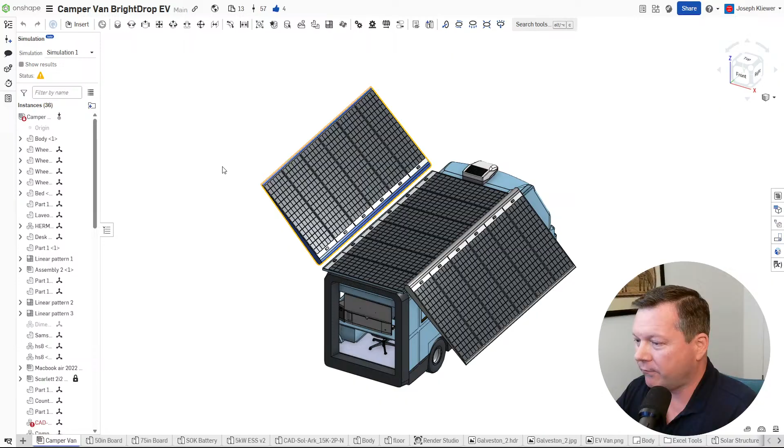We're looking at this BrightDrop van, and I thought today we could look at the solar panels. We had a lot of good input, different ideas. You know, do you actuate them? Do they fold up? Do they slide out? Do they fold down along the side? What about shading issues? What are the best panels? That kind of thing. So I got a calculator up here, and we can try out a few different options, kind of see what might be the best way to go.

So let's bring up the panels first. Let's take a look. What I'm looking at right now is these Maxeon cells, which is the same one... oh gosh, I'm just drawing a blank here. The solar car. That'll come to me in a minute. But they're really efficient. They're flexible. They're durable, and they have these panels that they're looking at making potentially here in the U.S. soon, and they're about 2 meters long.

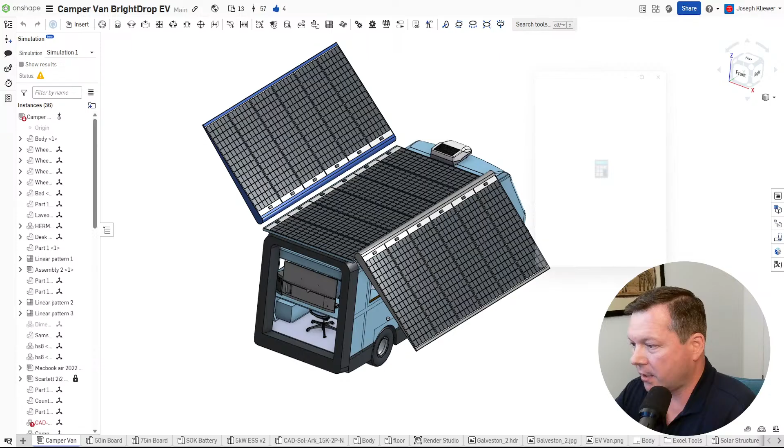2,000 millimeters by 800 millimeters, and the Maxeon can put out 340 watts per panel at almost 21% efficient. So that's what I've got modeled here. I've got 1, 2, 3, 4, 5, 6. So you've got 3 arrays. Each of them has 6. So what's 6 times 340? You've got that much per, and then times 3 for a total of just over 6,000 watts.

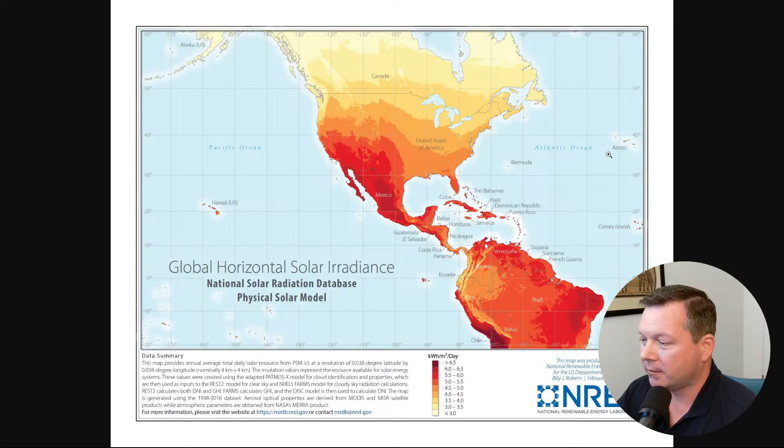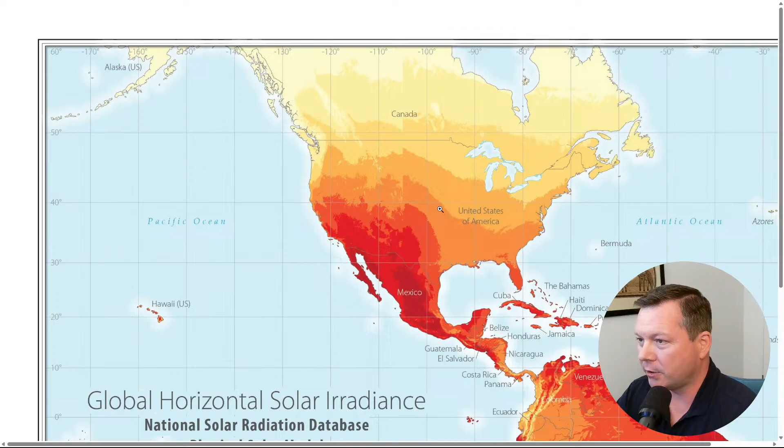So let's try out a few scenarios. For location, it really depends on where you're at. So if we look here, you can see solar radiation. Where I'm at up here in Michigan, it's not so great. And then you get down in here towards California, Arizona, New Mexico, it's really good. But if we pick kind of a middle of the road, right in Oklahoma City, kind of in the middle of everything, it might be a good average. So, Oklahoma City.

All right, so in Oklahoma, and this calculator done by the National Renewable Energy Lab accounts for weather variation, I think averaged over 10 years. And you can get the actual Excel data, and I'll put the links in here, and you can really analyze it and go more detail. But this quick little online calculator is pretty nice. So let's just call it 6 kilowatts, round number.

These are premium. If we look at efficiency here, premium, 21% efficient, at 0.35% loss per degree Celsius. So the temperature degradation, 0.35. Let's see what these are coming in at. Right here, 0.29. So they're even better. These SunPower panels, well, they used to be SunPower, now they're Maxeon, are pretty good. So that's good.

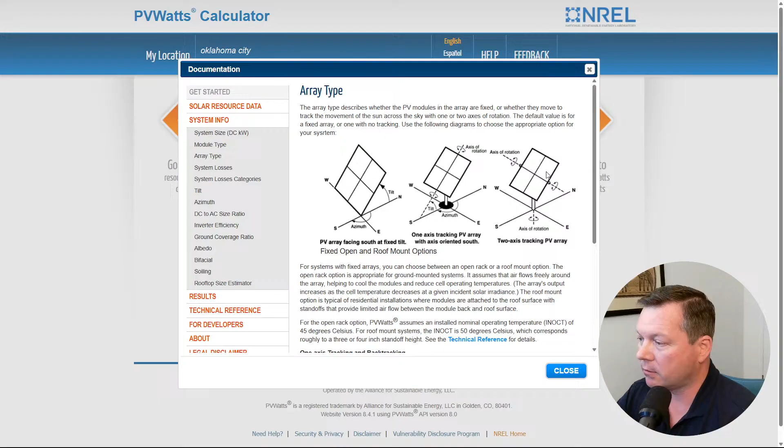Then we have our options here, fixed. Open rack is good because it gets the cooling from below. It goes over the information here. You have your tilt, how much it's tilted facing the sun. Your azimuth, where it's directionally tilted towards. So 180 would be directly south. And then if you have tracking, with one axis it tracks over the tilt angle, or 2 axis, it tracks everywhere. So we'll go fixed open rack first.

System loss kind of gives a default value. Soiling, I want to assume these are clean. You can clean them pretty easy. Shading should be out in the open, although we are going to have that middle panel shaded potentially, depends on how we design it. Snow, mismatch, do we have mismatched panels? No, they'll all be the same. Wiring, our leads are going to be really short. Connections, aging of the panel and things like that. So for these brand new panels, we'll just assume it's 0. We'll go for the max, just see what we can get.

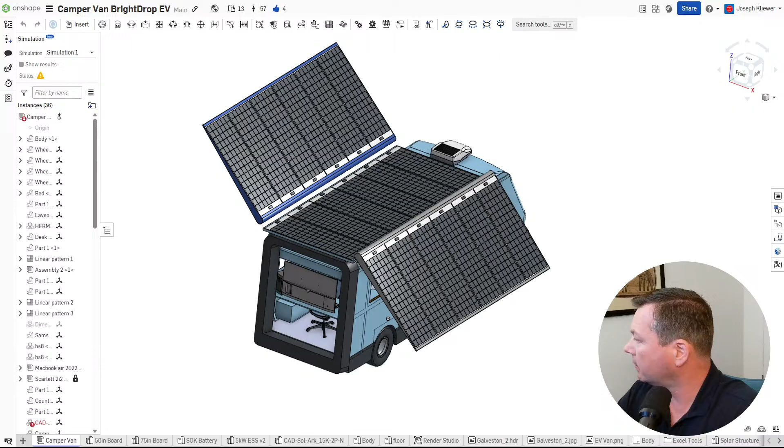And the tilt angle here, so how do we track? Let's see. Let's say we are the sun looking down at the vehicle, and it's going to be parked like this. So the sun is going to rise here to the right, come up, and set on the left side. So it's probably the most efficient. And then these would track up and down. Oh, I still have that gear constraint on there. Hold on, let me get rid of that. I did that for a quick animation. I'll just suppress it there.

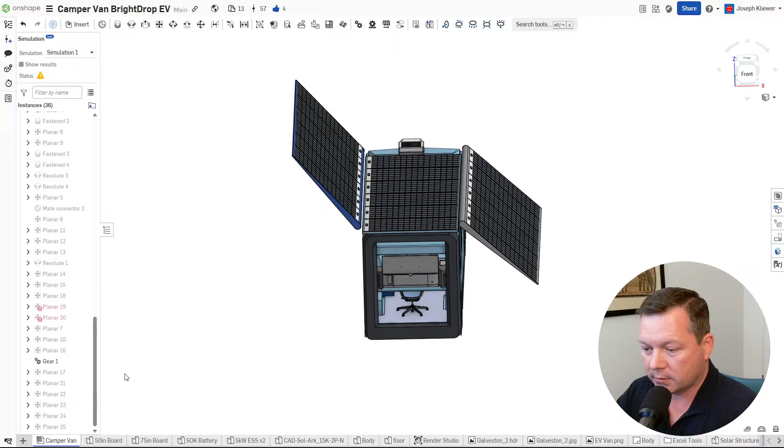So the sun would rise, it would be facing like this. You're going to get a ton of energy, and then as the sun sets, this one comes all the way to this side, and this one will go up vertical.

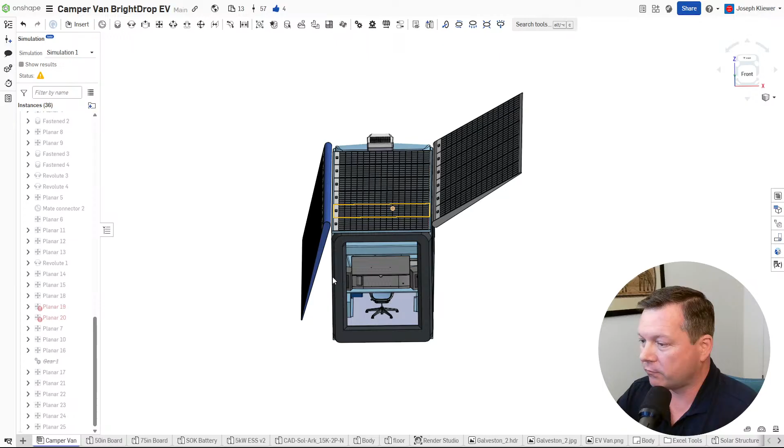Alternatively, you could have it static, and you could have them facing optimal for whatever latitude you're at. And then if you're the sun, you would look at it like this. So the sun would still come from the right to the left side, but if you had a static array, this would probably be the best setup.

But this middle section here, it's basically flat on the ground. So if we look at our tilt angle here, for this scenario, it's 0. And if it's fixed, let's just say they slide out. It's like this. So fixed, it's flat, 0, 0. In which case, if this is 0, our azimuth doesn't matter because it's not pointing anywhere. And then we can check the calculations.

And we have AC energy kilowatt hours per month for a total. This is pretty good. Let's take a look numerically and see. So when I went from New York City to LA, I think I used 700, maybe 800 kilowatt hours total. I planned to leave in September, ended up leaving in October, and I didn't get there till the end of November. So let's say we average those two, which would be about 500-600.

And I used 700 or maybe 800, I forget. So I could almost have made it in a month, but I had a lot of shading. I don't remember if you've seen a lot of the videos. I think one here we've been following since the Tesla journey. So cool. Yeah, so I had a lot of shading issues, and I couldn't get anywhere near these numbers.

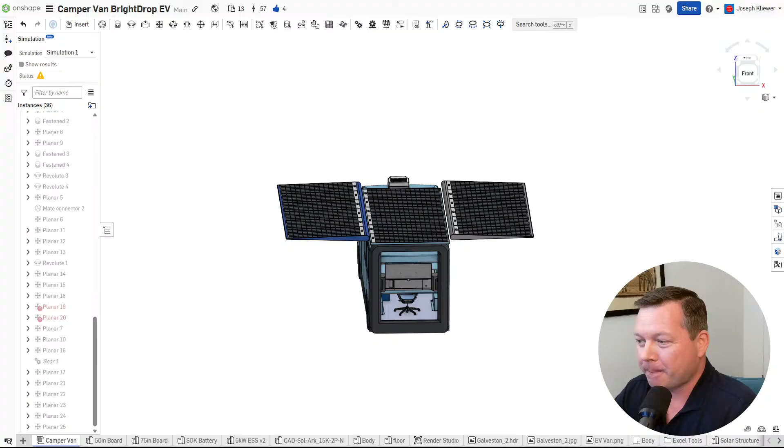My estimate originally for the Cannonball run was 20 days optimal, everything went perfect, sunny every day, 30 days likely, 40 days worst case scenario. And it ended up being just shy of 2 months. But in this scenario, we get rid of a lot of those shading issues because a lot of them were grass and ground obstacles shading it, and the panels in the front were shading the panels behind. And that really kills the cells.

A lot of people comment that if you just shade a few of these, you kill the output of the whole panel because it's all in series. So if you shade a few of these, they turn into resistors and it just knocks out your whole array. So that was some of the problems I had. But you can see, in the summer, we've got over 1,000 kilowatt hours a month.

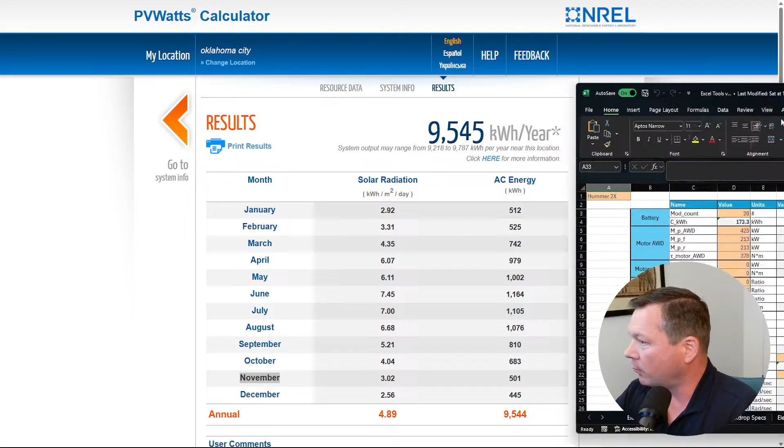And if we look at the BrightDrop van, which I'm working on a little bit more advanced Excel spreadsheet on. I'll post this in Onshape too so everyone can pull it down. But the battery is 173 kilowatt hours. So let's take that number and we get 1,000 kilowatt hours in a month. So 1,000-ish divided by 173.

That means in theory we could take the BrightDrop van, drain it completely empty, and charge it full almost 6 times in 1 month. And if you drive conservatively, you can get 300 miles per complete charge. So in theory, in a good summer month, you could go almost 2,000 miles on just solar, assuming you take advantage of every bit of sun you get that month, so you'd only drive at night, etc. It's pretty good. In fact, maybe this thing could do a cannonball run quicker than I did. And that is no tracking, just completely flat.

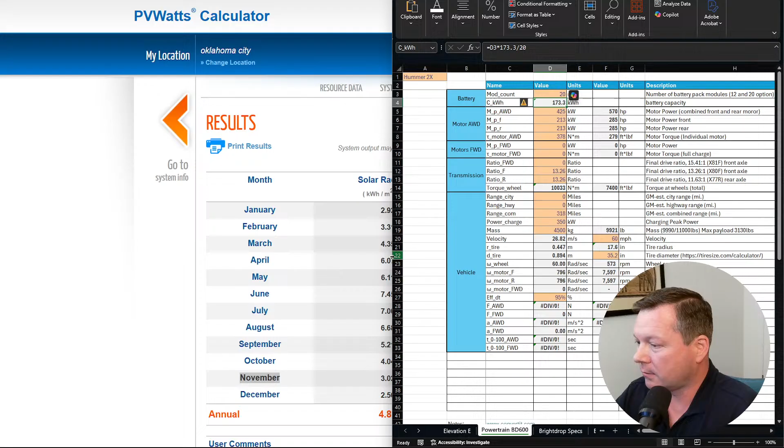So let's see. Actually, I'll take a note of these numbers here as we're going. I'll just put them here for now. So we've got a max of 1,164.

If we go back to the system, and now instead of fixed, we are one axis tracking. That bumps us up to... so what's the highest? 1,468. So that's as it's designed right now with actuators, assuming no shading. Another thought there, well, I'll cover that later, what happens if we drop these down, what kind of options.

But the next option someone mentioned is, why don't you just leave them flat and use bifacials, because they're going to collect a lot of that light that's bouncing around. So let's go fixed again, and this time we'll switch them to bifacials. Where is that? Oh, here it is, bifacial. Let's see, what does that get us?

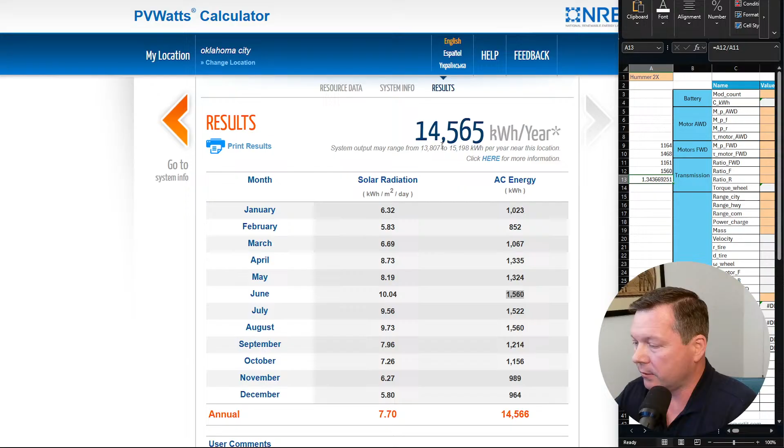So if we just kind of compare our efficiency bump, we're getting about 34% improvement by going full tracking. I've heard it's somewhere around 40%, but this does include weather, so it's not considering a perfect ideal sunny day. But if we look at just tracking one axis, we're not really getting that much, so maybe a slide-out array would be better, but that's got its own issues too. So we'll go back to one axis tracking. 12,470, so we're still getting some pretty good numbers here.

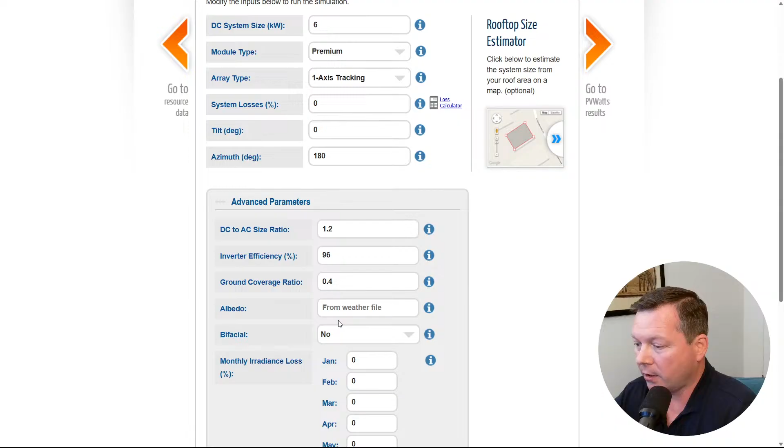Now if we are on one axis tracking and we can tilt them, so let's say we tilt them at 40 degrees, which, you know, maybe you park on a 40-degree hill. Let's see what that does. It doesn't help too much in the summer, but overall we're kind of in that range of 1,000 kilowatt hours to 1,500 kilowatt hours. So back to panels.

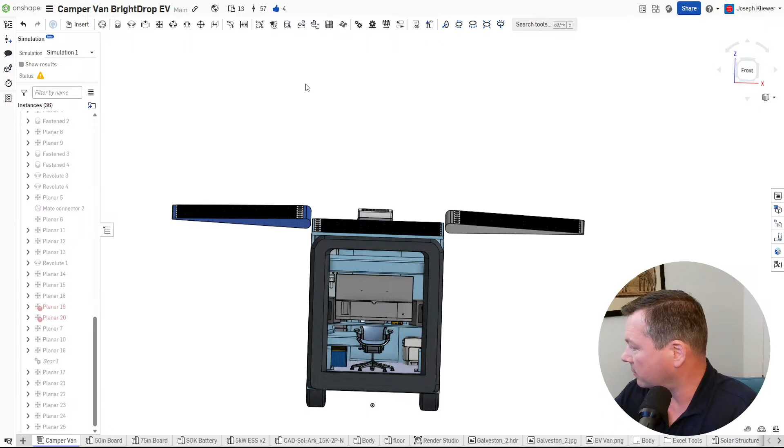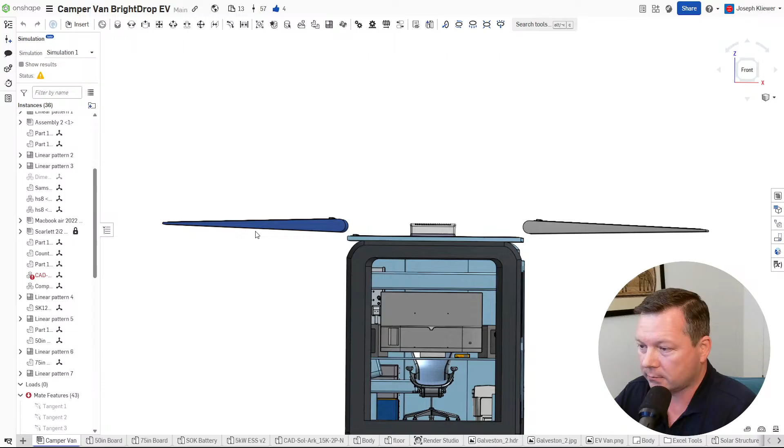What kind of options do we have, and how can we actuate these? If they are folding, I would like them to fold onto the roof and be able to fold down to the side. It's not letting me move it. Come on, there we go. It's getting a little slow on me. Well, you get the idea. So they're closed, they're sticking out, they're kind of goofy.

So if we drop them down, let's see, we'll go into our file here.

Oh, someone's trying to call me. Can't answer now.

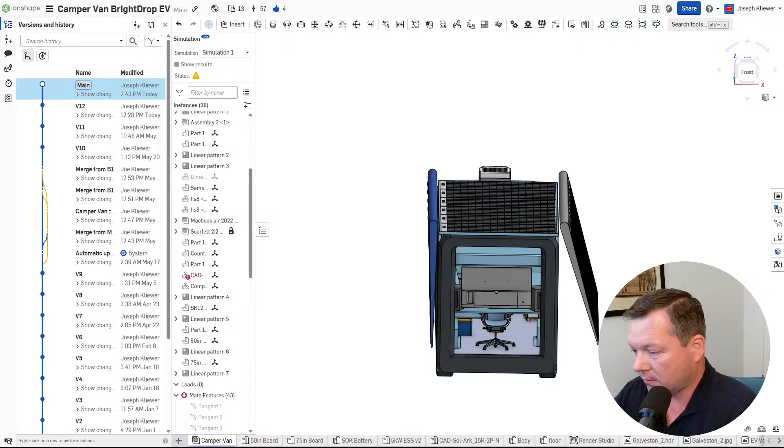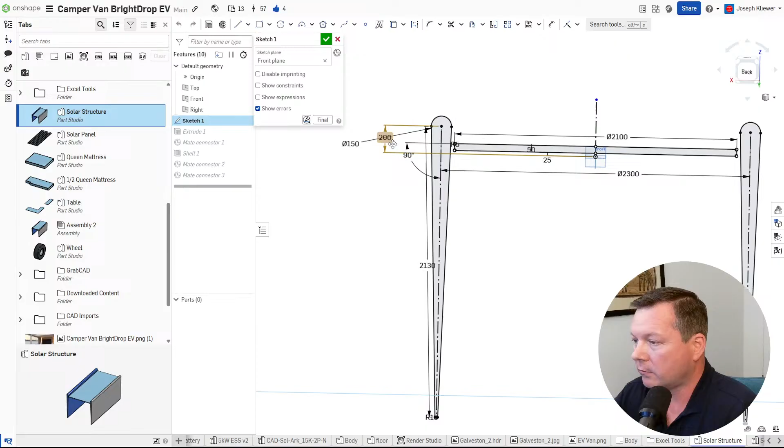So let's go into the, I forget how I got there. Here it is. This is what I'm looking for. So this is kind of the design tree here. Here's the sketch it's based off of. So if we drop them down from 200 to, let's say, 25, like that. And then we go back to the van. There. Now it looks a lot more streamlined, but you can't fold them onto the top now because they'd interfere.

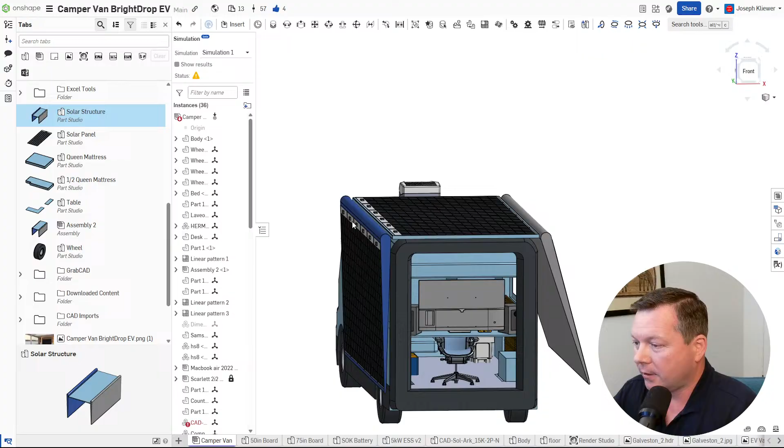And that could be okay, but the idea is that this thing is going to have some passengers in the rear, and if you're driving down the road on a nice long road trip, you'd like to be able to look out the windows and enjoy the view. So for that aspect, it would be really nice if they could fold up on top. Let me go back there, put that number in, edit the sketch. This was 200. Changes that and that. And then go back to the assembly. Then we can fold them back up.

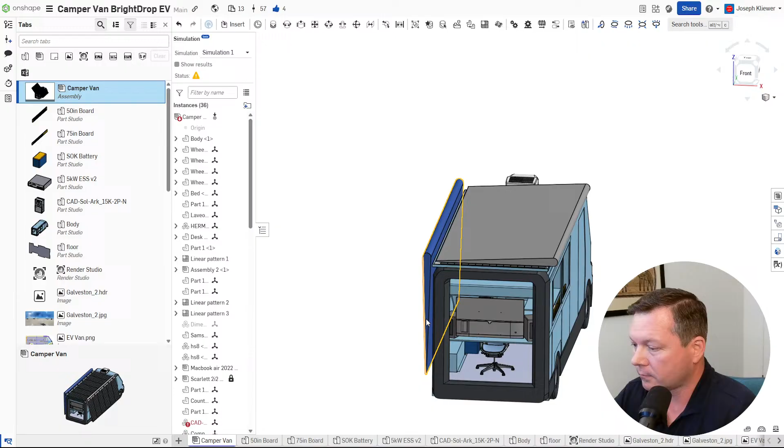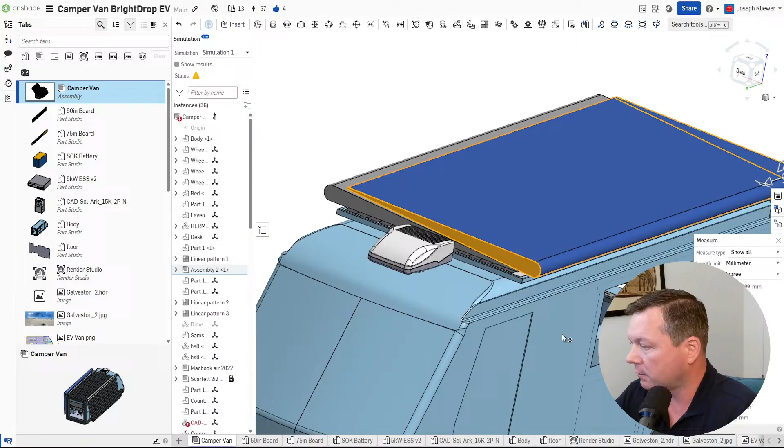But we're not getting a huge bump from having them actuate, and that's not an easy task. These are huge panels. They're 6 feet by, I think, 10 feet. Let's just measure it here. So I'll measure from here to here. We'll do feet. Okay, so it's 16 feet long by 6 feet. So if you got a wind load, that is going to rip these things around pretty good. So your actuator is going to have to be quite strong.

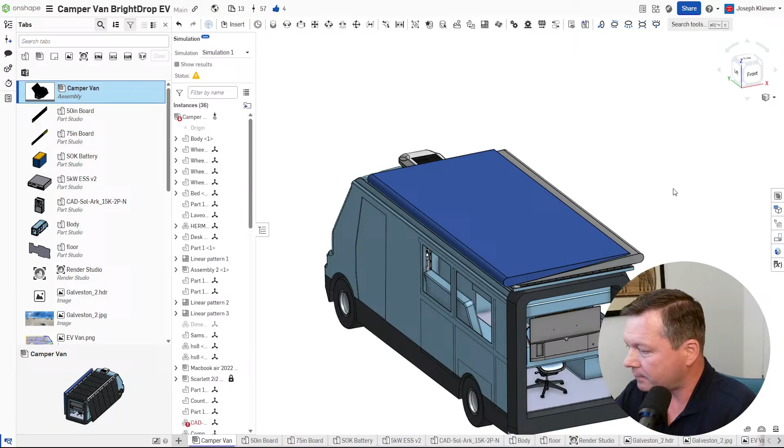I thought probably planning for a max wind load of 40 miles an hour that would hit one of these panels, but then having a protection mode where if it detects a 20 mile an hour gust, it would automatically fold up. So it'd be designed to handle 40 miles an hour, but at 20 miles an hour it would fold up, and possibly have a feedback loop where it's monitoring the motor and the gearbox, and if it sees a certain torque on the motor, that's mapped to a wind speed, and then it would fold up automatically.

But then you still got that wind, and you've got to fold against it, and you've got the weight of the structure, which would be lightweight, similar to an aileron on an airplane. So it would be designed just like a wing. It would have sheet metal with sheet metal stamped struts going throughout for lightweight and strength. But still, that's a lot of force to actuate. We're talking probably a couple thousand foot-pounds of torque that motor would have to actuate against, and you'd have to have a pretty big reduction. I was thinking maybe 1,000 to 1 reduction would be around what you'd need.

Let's see what we got in the comments here. Do you want to avoid the side mount arrays shading the roof array in the late afternoon? Yeah. If they slide out, they can be stacked underneath, and they won't protrude above. They won't be sticking above, and they should get rid of a lot of the shading.

Do a 4-bar linkage hinge. 4-bar linkage hinge. I'm trying to imagine that. I'm not quite sure what that is, but if you have a picture of it, drop it in Discord.

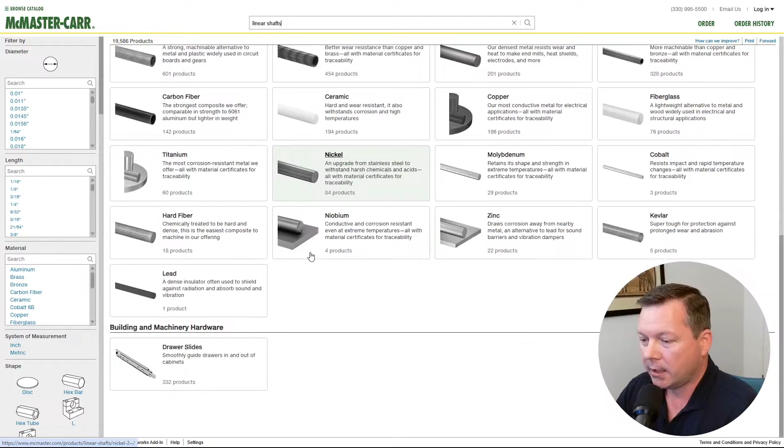You've got ball screws. What a lot of people I think are familiar with are drawer slides. And they make heavy duty ones, and I think this is what people that have slide out arrays typically use. The problem is they're not really good for automotive. They've got this telescoping feature where they've got balls on both sides so that you can get something that's a certain length and it can slide out to match that same length. And it's got kind of this intermediary that goes halfway on each side.

The problem is all this is exposed to the atmosphere and the climate. So when you're driving down the road, you're behind that semi on a winter slushy day, and they've salted the roads and you get that mist all over your car. That is salt water just spraying everywhere, which will corrode these kind of things real quick. And maybe you could put like a large rubber boot, telescoping boot or something that would seal it up, but it's just really hard. Or when the thing closes up and it's completely closed, then maybe there's a gasket to seal all the way around, and that way you're sealed. But they're really hard to seal up, and they are heavy. If you're going to do something this big, they're still pretty heavy to handle that load.

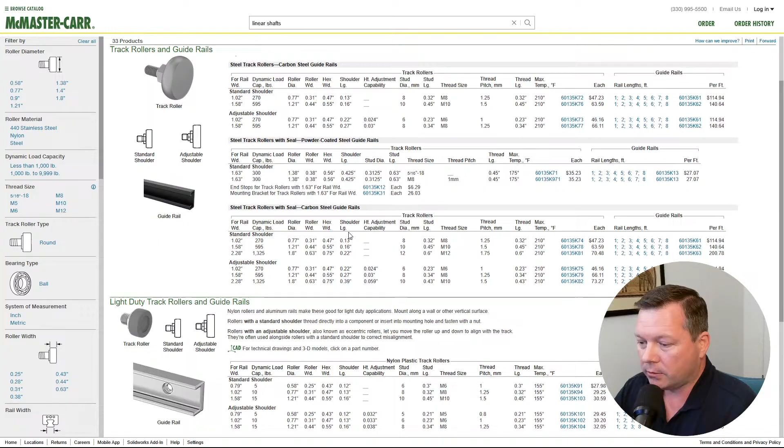So we got those. What I like for sliding though is track rollers or cam followers. Let's see here, let's do cam follower. So motorhomes, in the comments here, have slide out storage trays rated to thousands of pounds. That's true. I haven't looked at those slide outs to see exactly what they're using. I should look that up. That's the first thing you do, you go figure out what's already out there instead of trying to invent your own thing every time.

So for track followers, I like these V-groove because they'll stabilize in both ways, and they should have stainless steel, and they're sealed up so you can get all the bearings and everything grease packed and sealed. And then the exterior is stainless steel, so they're rust and corrosion resistant. Let's sort on V-groove, and then stainless steel 440C with seals, 440C without seals. 440C stainless is a really hard stainless steel that can be used for bearing applications, so marine applications will use it.

It does rust though, all stainless steel rusts. It's just how resistant it is to rust, but it will rust eventually. But all the ball bearings inside, as long as those are sealed up, you're good. And if we get to our radial load, looking at maybe 2,000 pounds, those are not cheap.

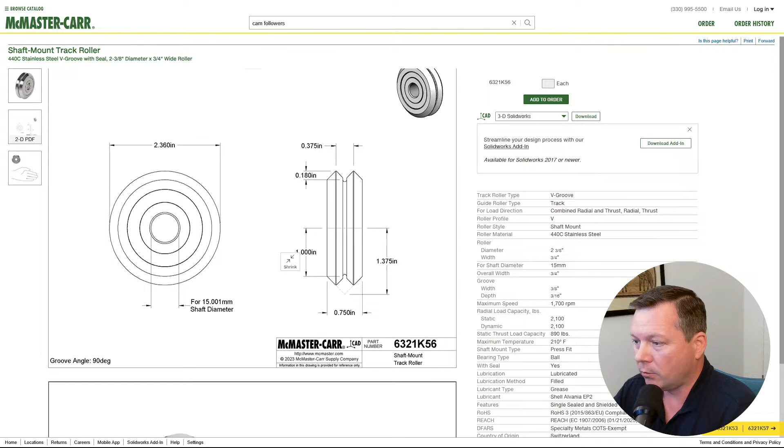Just get an idea for the size here. So yeah, they're not small, but you could potentially have these nested inside two tracks, and then you could roll it out. Another option is maybe it slides out and then it pivots, and it has a stand, something that you can attach to. So you can slide it out and you can still pivot it for optimal position, kind of statically.

Okay, we got the 4-bar linkage. Let me grab that. So here's what someone was referring to, a 4-bar. So it's going to go up and out, and depending on how you make these, you can make it tilt at the same time. So if you had a 4-bar on there, I'm trying to imagine it here, it could potentially lift off and pivot back at the same time. So as it folds up, it still gains the height to come back on top.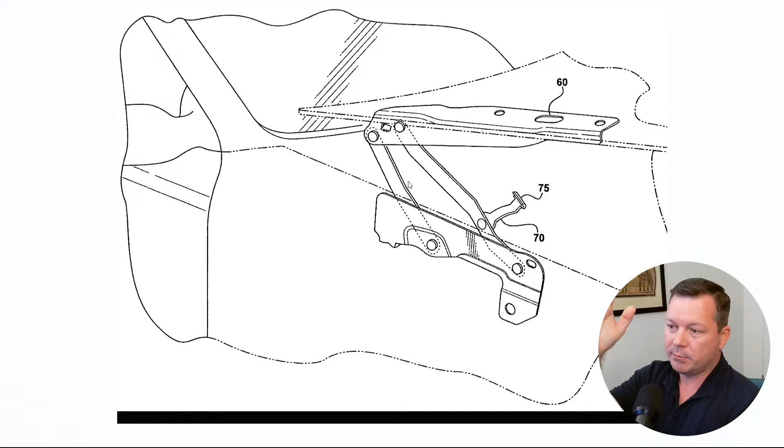And then we just need to figure out a way to actuate it. Maybe something like this, maybe a hydraulic piston or something, electric driven hydraulic piston. But yeah, that'd be fun to play around with. See if we can get some kind of 4-bar link or 2-link system like that. Similar to a double wishbone suspension on a vehicle. You can get a lot of variation in how it behaves by changing these pivot points.

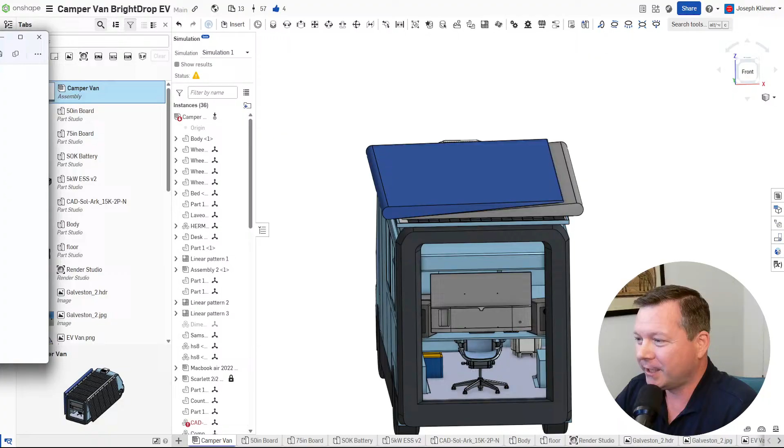In fact, I saw a while ago there was some project at a university where you could describe a motion, and then the algorithm would calculate what kind of linkage could make that exact motion. And it was crazy. Like you could say, make my signature, and it would come up with a linkage system that would make your signature. Now, not practical, but for something simple, maybe you could sketch it out and say, hey, I want it to move up and over like this. Now solve for the linkage system that would do that. And if it's manufacturable, then that'd be pretty cool.

Let's see what else we got in the comments here. Well, you know the slide out on an RV. Curious what kind of system. It looks like maybe the drawer slides. But this isn't the slide out section. This is just, but yeah, drawer slides. But then the actual slide out living section, I wonder if they use the same thing or if they're using something else.

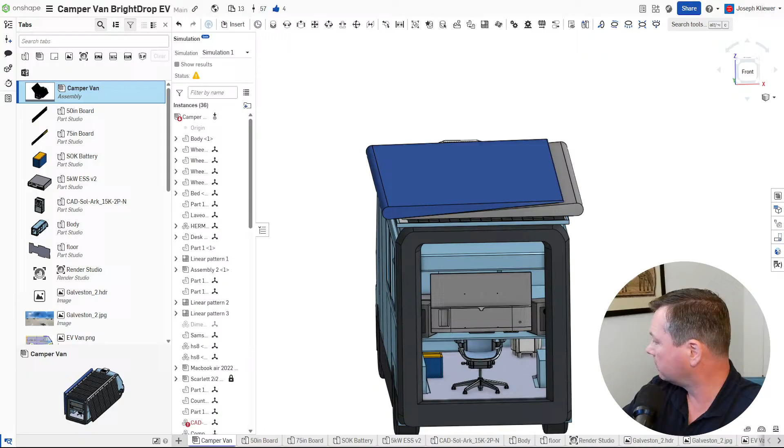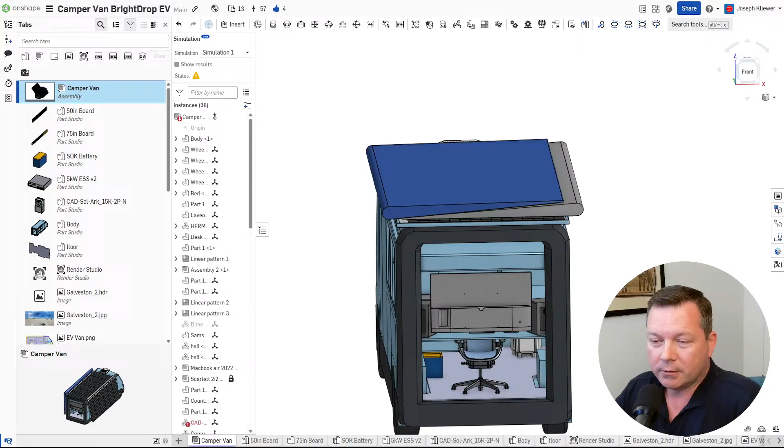Let's see, I got comments in two places here. "I've never seen anything heavy enough that would be non-rusting or sealed, but they will work with lubing often." Okay, yeah. It's kind of like old cars, just grease zerks everywhere. You just keep pumping in grease and pumping all the junk out.

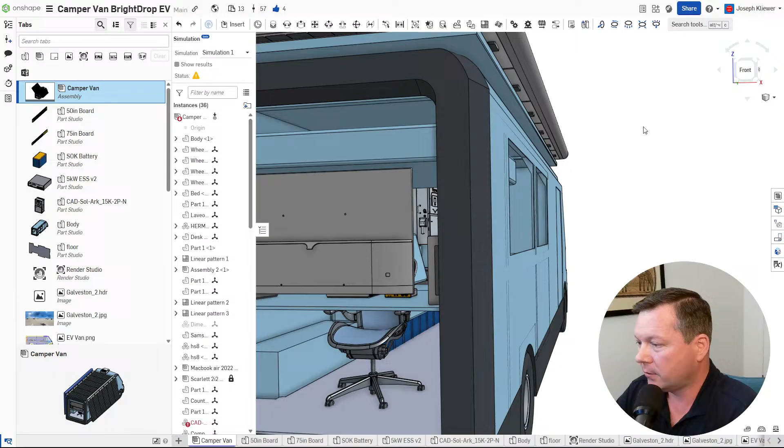How much solar am I targeting? 6,000 watts. In fact, let's go inside here. If you turn on perspective view in Onshape, it'll let you fly in through a wall and you can see inside. So we got 6,000 on top, and then I was toying around with batteries. Let me just go ahead and section it, chop off this wall. So rack mount batteries, and then these are marine grade batteries. A rack mount, this would be 25 kilowatt hours. This marine system down here would be 30 kilowatt hours.

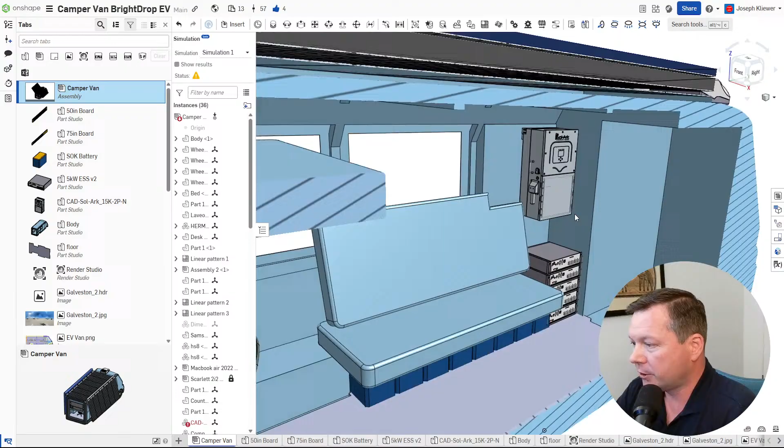So you should be able to charge it up fully in a day, no problem, and then be able to charge the van. So this inverter here, it's not that heavy. It's 120 pounds, but it's a 15,000 watt inverter, and it'll do a 48 volt DC battery system with almost 300 amps DC. It'll do 120 volt AC and 240 volt AC. So you could do level 2 charging on the van, and the van charge port is right down here.

They have two versions. One is 11 kilowatt, and I think one's a 17 kilowatt charge. So you could do the 11 kilowatt charge no problem with the inverter. And with the solar, you'd have enough excess that whatever you're powering in the van, you have plenty left over to charge the van. So you get out into the middle of nowhere, you can go stay for a week, and by the time you're ready to go, you could have the whole van topped off and charged, ready to go somewhere else.

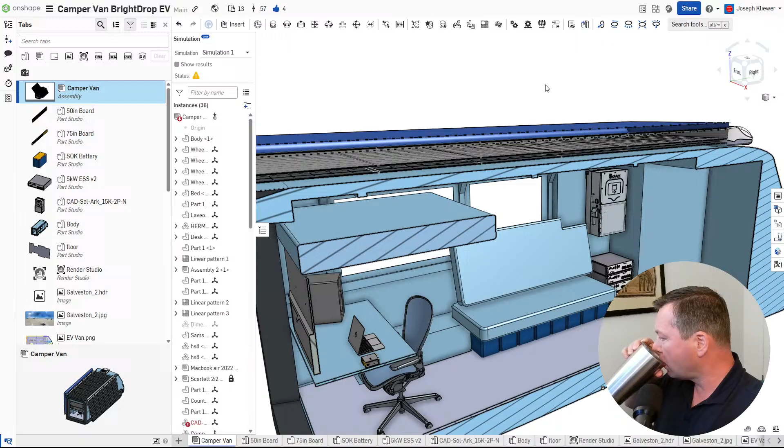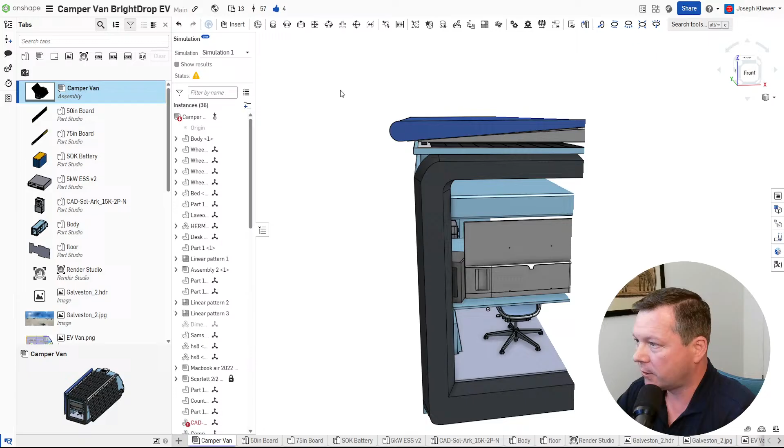Let's see. So that's the solar panels. I think I'm going to investigate and spend some time trying to map out what a slide out would look like and calculate the loads, the wind load, and size an appropriate slide out, and then see if we could seal that up, or if we use cam followers that are already kind of sealed and they could ride on grooves.

And for manufacturing the structural and the frame, I was thinking to use techniques by trailer builders. There's a lot of aluminum trailer builders here in the US that fabricate up and weld up trailers, and kind of the extruded, square section aluminum welded together can make a nice stiff frame. And then the BrightDrop van, you can tie in kind of on this lip here, is tied in pretty structural to these aluminum rails here and here, which are kind of cage off.

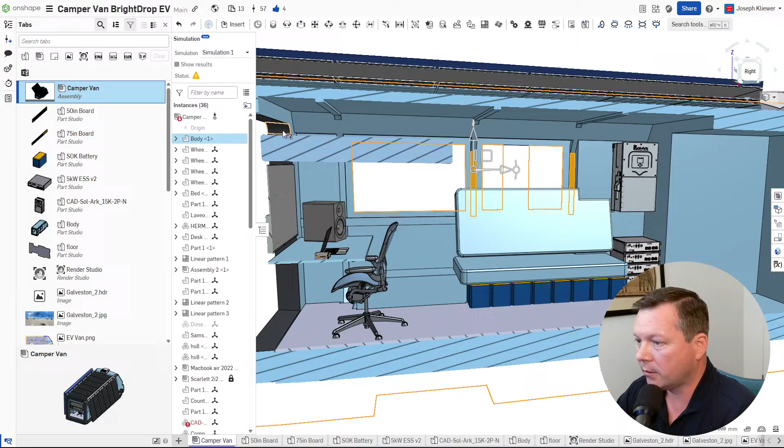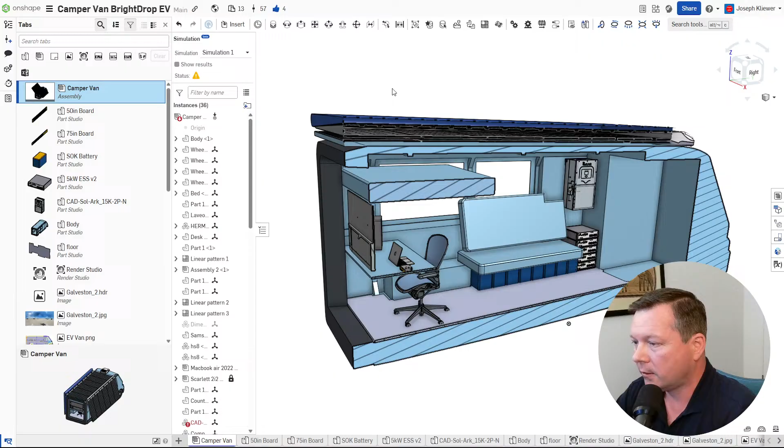They're pretty stout, but also in the front, which I haven't modeled here yet, is a really heavy aluminum bulkhead in the front and the rear. So if the solar panel mount had kind of a structure in the front and a structure in the back, you could tie directly into those bulkheads and you'd be incredibly rigid. So the mounting is pretty easy, I think. And the roof is just real thin. So the idea is to not even touch the roof and have an air gap between the panels and the roof to get cooling and everything behind the panel.

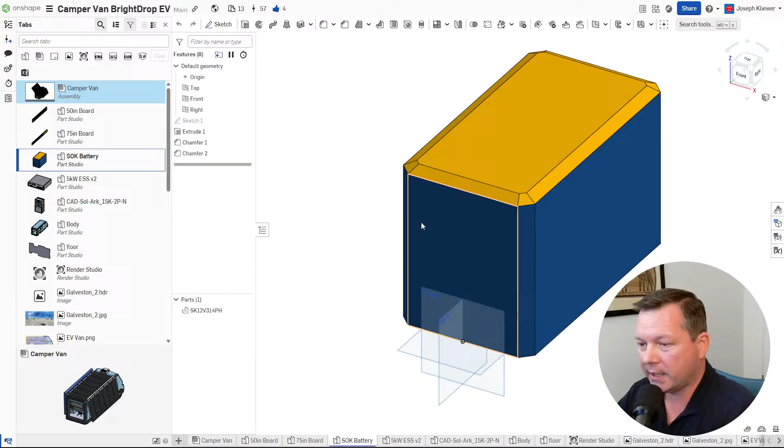So yeah, so you got the Sol-Ark 15K, which, oh, that's the battery. So this is the inverter. And then this is one of the batteries I was looking at. I just did a quick model on it. It's an SOK battery. I think these are about 1,000 a piece, and I forget the capacity. I have it written down somewhere, but they're pretty good value. Most of the cells are coming out of China anyway.

They're all lithium iron phosphate pouch or prismatic cells, so they're not cylindrical. The cylindrical are a little safer because they can handle pressure. The pouches will expand. If you've ever seen some of these when they go bad, they start getting gas in the pouch and it starts expanding and building up pressure, and that can be an issue. But lithium iron phosphate is pretty safe chemistry compared to the normal batteries in an EV, but it doesn't have the same power density. So if you're designing a car and you need absolute maximum range, then these aren't the best choice, but they're lower cost.

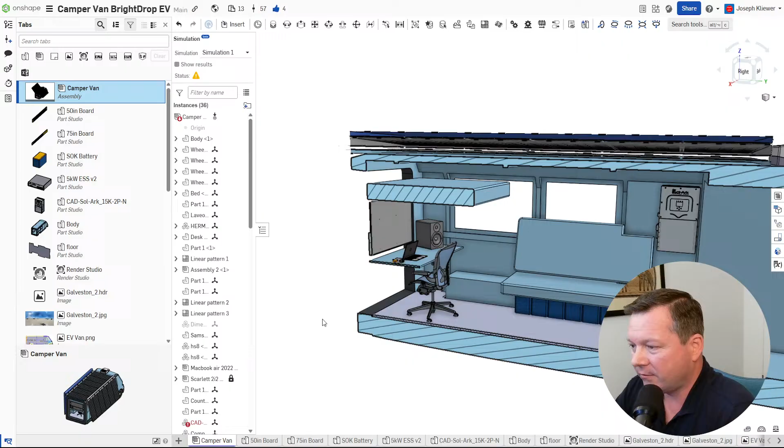So China is actually leaning heavily into lithium iron phosphate, and they do have way better durability, cycle count. So a lithium ion battery cylindrical cell will retain its full capacity for about 500 charge-discharge cycles. You might say, well, that's not very many, but a full charge-discharge cycle on an EV is, say, 300 miles times 500 cycles. So that's a 150,000 mile battery. And that's not when it's bad, that's just when the degradation starts to get to you. So maybe it's like 90 or 80%.

But these lithium iron phosphate, like 5,000 charge-discharge cycles. So 5,000 times 300 miles, that's a 1 million mile, 2 million mile battery right there. So that's pretty incredible. And they're lower cost. So that's why I think China is leaning heavily into these. And they have the biggest production and manufacturing. So you can buy them in the US, but chances are the cells are coming from China anyway.

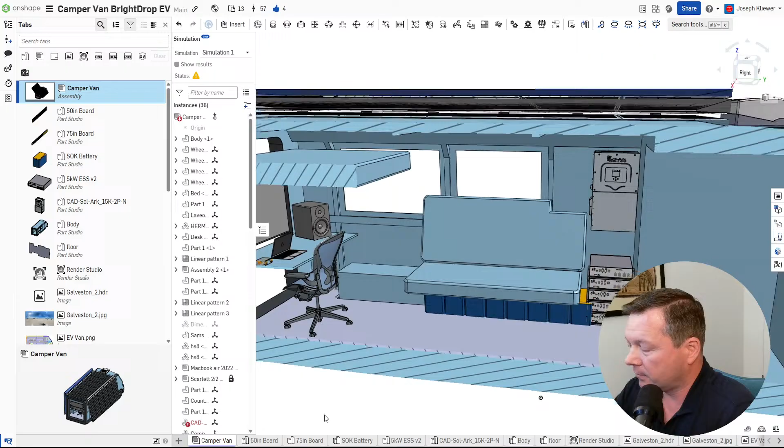And the rack mount, they're a little easier sometimes, but I'm not too sure about shock and vibration. I like something that's like these marine grade or something that's designed for a mobile application. Briggs & Stratton does have a really nice battery, but they're kind of expensive. Really good durability, but their cost per kilowatt is pretty high.

So I think the bogey, the target that most companies are going for, I know when I was at GM, I think it was $100 per kilowatt. Now that was their cost, raw manufacturing. That doesn't include battery management system, structures, all that stuff. But let's just say it was $100 per kilowatt, and you have an EV that's 85 kilowatts times 100, so you have a battery cost of $8,000. We know that right now, if you have to replace an EV battery, it's probably double that. So between 10 and 20,000. They're not quite there yet, but they're getting there.

And some of these cells down here, because they're a complete package with the battery management and everything, and its retail price, I think they're around $300 a kilowatt hour. So if this was 30 kilowatt hours times $300, that's about $9,000 just in batteries. I think these are a little cheaper, I think they were $250. So 30 times 250, so $7,500. Not cheap, but that's a lot of battery power.

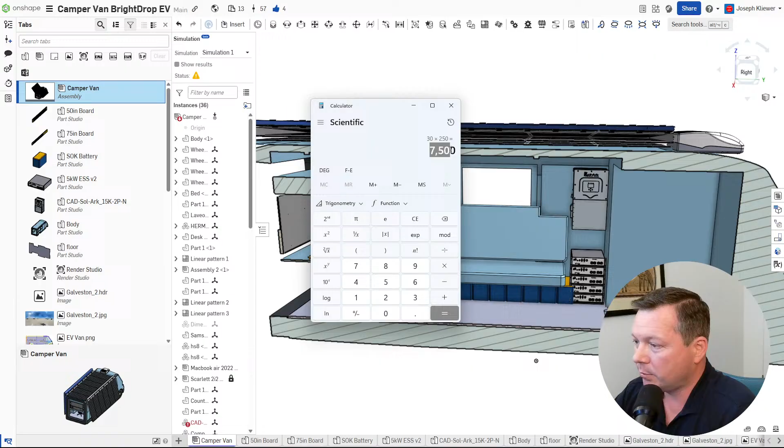Oh, and options too, configurations. I mean, the simplest is you just get rid of the 2 extra panels and just have the roof, and that's 2,000 watts right there. Then you can downsize your batteries, you can downsize your inverter, you can make a much lighter, leaner system and save a lot of money.

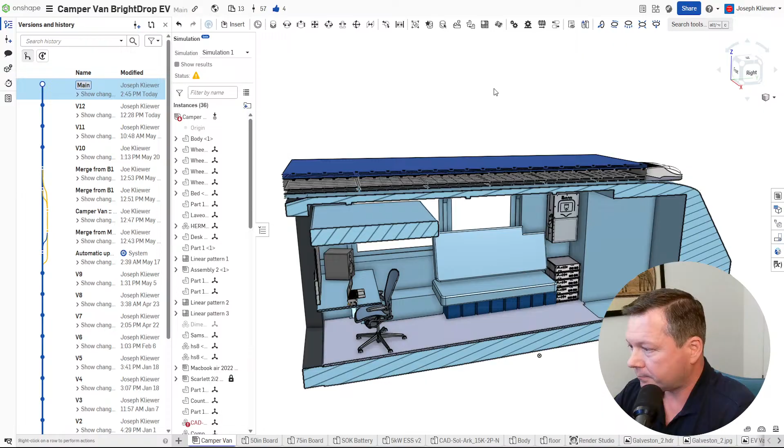And it's just an optional thing, which I haven't done yet, but in Onshape you can do different configurations. So you can play around with it and make multiple configurations. And it keeps track of everything. Let's see here. Example. We go back a few versions here. I was improving the accuracy of the model.

So if I look at the body, how I originally had modeled it, I'd taken these sketches, which were pictures, and then I drew on top of the picture and sketched the profile, and then I matched it with actual dimensions that I measured. And so I did the same thing for the back of the van. But when you do that, you can see how I kind of had to estimate it because the picture isn't square, it's not a perfect picture. So there's kind of a lot of guesstimations going on.

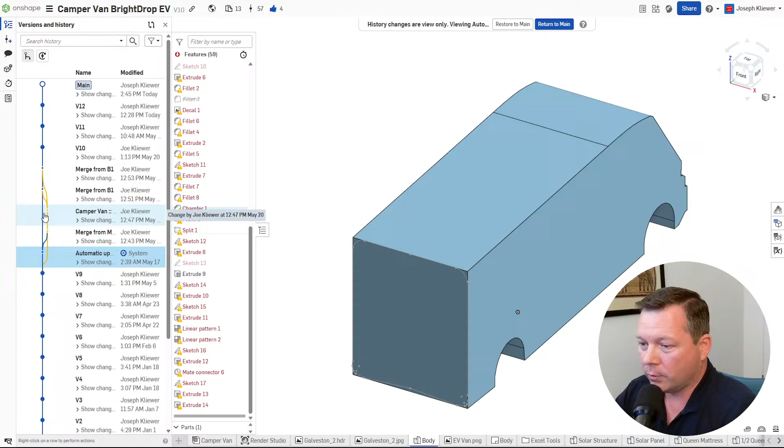So I started working on it, I got some better pictures, and in the process, I broke the model. So it bricked every feature on the feature tree because I was editing up at the beginning of the feature tree, and so it breaks everything down past that. So what I did is I branched it off, and then I kept working on the main where that was still working, and then once I got all the errors fixed in the body of the BrightDrop van, I merged it back together, and it tells you pick what you want to keep and don't keep, and it merges everything back together. It's super slick.

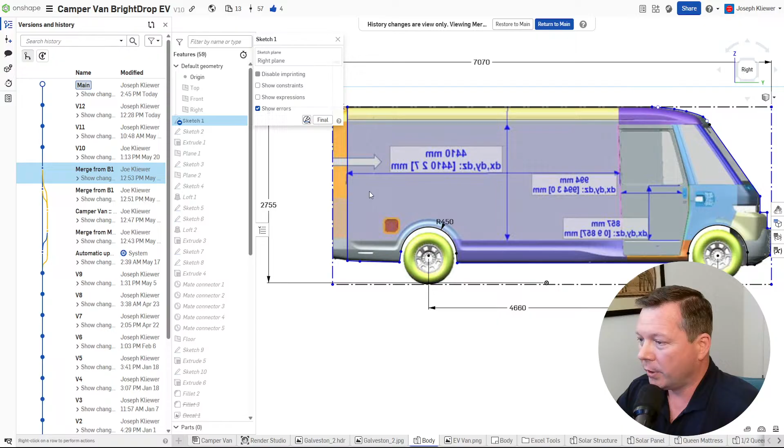And now my sketch is based off of a sketch out of NX. That's the CAD program GM uses. And so a screenshot out of NX is going to be, not dimensionally, but proportionally pretty much perfect. So if you just know one dimension, you know all the dimensions. So I did that for both the front and the rear sketch. And now you can see everything lines up. There's no gaps. So this one now should be dimensionally more accurate.

And then also I have access to a van that I can go take measurements of, and I have the GM CAD data. However, the CAD data is confidential, I can't share it, but if I need to take measurements or get details, I can. So I can keep refining it off of the GM CAD. I just can't put that in Onshape here because this is all open source, everyone can see it. So that's the good news. And this should be much more accurate now.

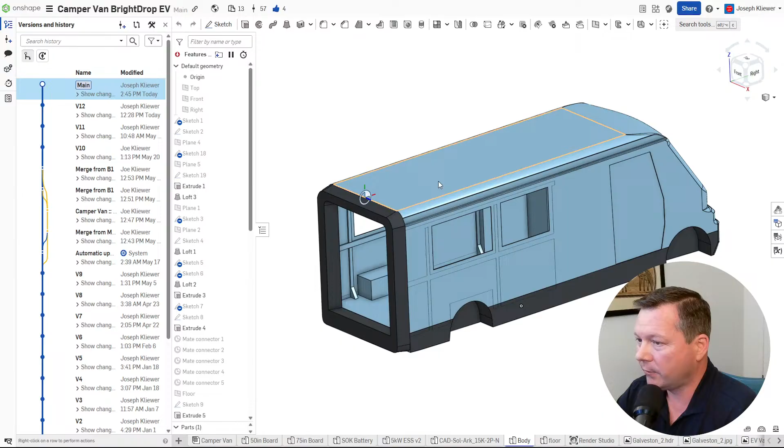So if you pull up the BrightDrop van itself, the interior dimensions, everything that's dimensioned here should be pretty accurate, and you can click on it and see how it was drawn. Some of it, if it's blue, it's not fully constrained, so I didn't have the exact dimensions for that. But now that I have the GM models, I can correct that and get them more accurate.

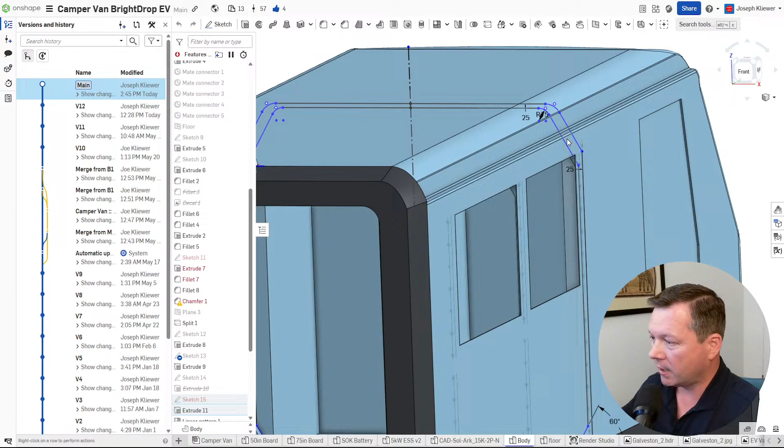Oh, let's see the comments here. "You've got to do a rolling garage. The package can go over the top and you only need panels on the side top. Open the garage door and the panels power the other side." A rolling garage door. Not quite sure I understand that comment. But it does bring up the rolling garage door.

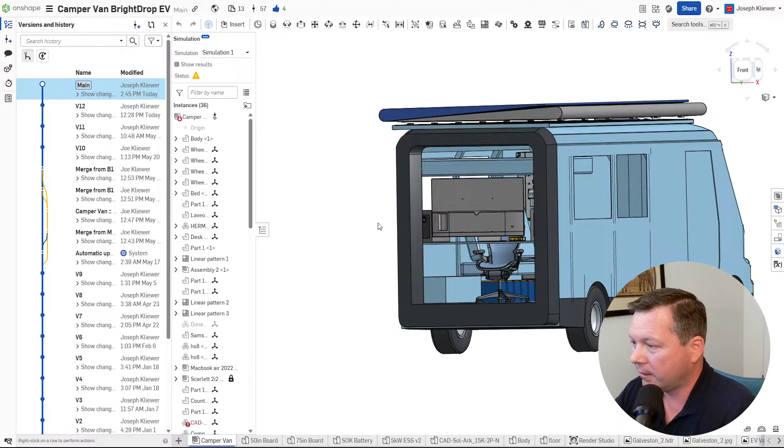I go back to the camper van. So it has a rolling garage door, which I've deleted here. And after looking at it and talking to some people, I think that garage door's got to go. One, it's really noisy, it clanks a lot, it's hard to insulate, and it takes up a lot of real estate inside the van. Go inside again.

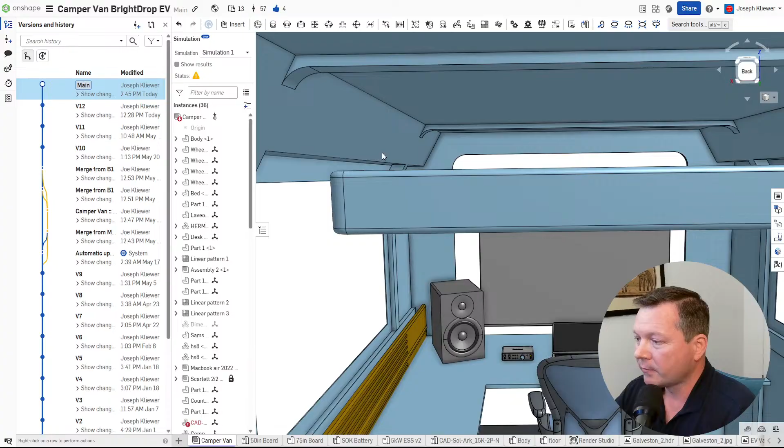So this bed, I want it to be able to raise and lower. This is a queen size bed, so it lowers down, you can sleep on it. It raises up, but about as high as you can get it is up to this feature here before it starts to interfere. And the garage door takes up all this extra space in the back of the van. So you lose a bunch of headroom, just extra space that's just wasted. So I'm thinking of probably like a double door opening on the back, a traditional van door.

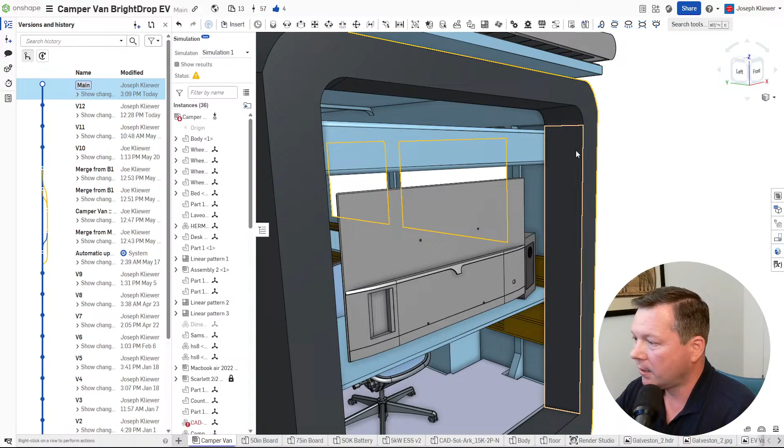And you can build out in the frame. I don't have it modeled yet, but behind this plastic facade here is where the garage door bolts in. There are already studs built in. So you bolt out the garage door and there's already a studded frame that you can bolt right into. So once you get the dimensions, you should be able to build it out, install it, and then just bolt it right in. No need to add any extra fasteners or anything.

So that's that. So I guess for updates, really I made the van itself more accurate dimensionally. I haven't played with the solar too much. I did add the Sol-Ark inverter, which is actually pretty cool because that's what I used on the Cannonball run, a smaller one, a 5K. This is a 15K. And they thought it was pretty cool, so they reached out and said they would send me one if and when I need it.

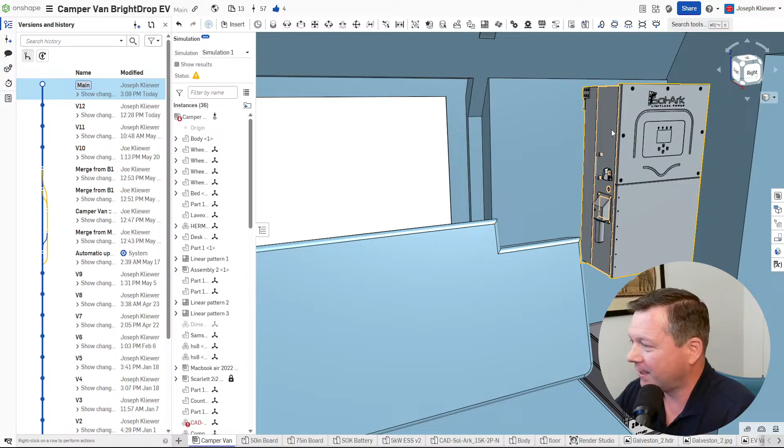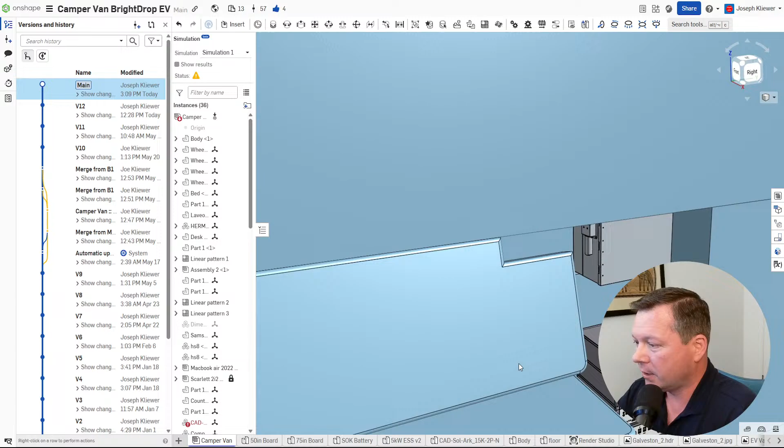So at first I thought, well, 15,000 watts is so much overkill. But if you're going to charge the van, you could really use it, because if you can only charge it at say 5 or 6,000 watts, it takes forever to charge the van. Now, granted, you might only get that much from solar, but your solar can slowly trickle charge and get your battery charged up, and then you can dump that all in really quick. So if you're stuck somewhere and you need an extra 30, 40, 50 miles of range, having a more powerful inverter is really helpful.

And it helps make this more versatile. So it's not just a camper van. You could build it out with just the inverter and solar and batteries, and then it can be a utility truck for anything. So you could power whatever you want. I mean, a 15 kilowatt, that's a house, right? You could power your whole home.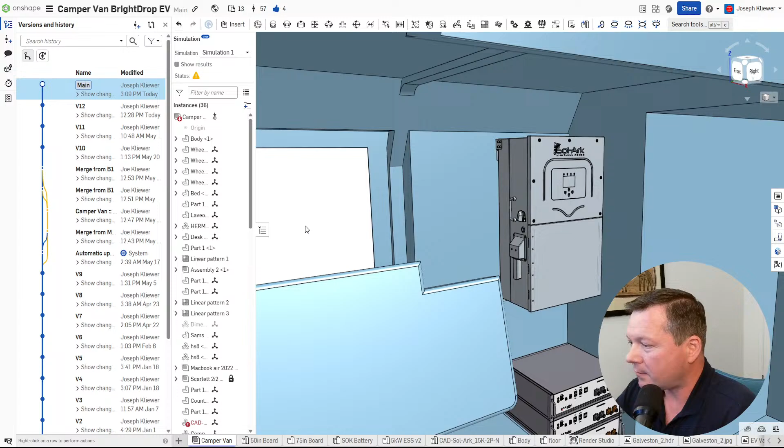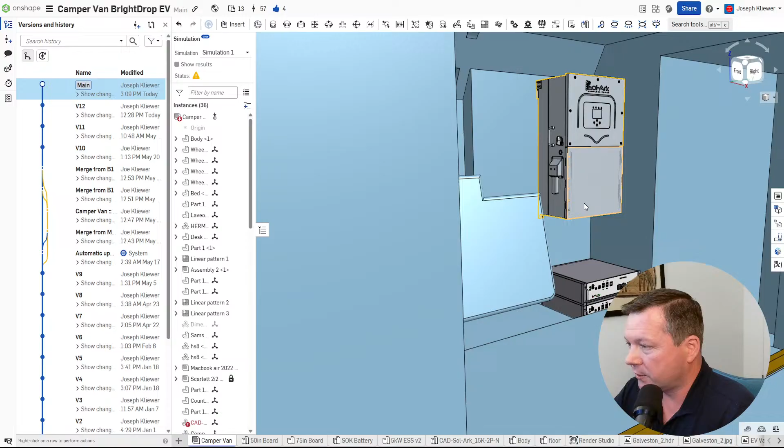And then the next thing is can you tie into the GM batteries? I did see a cool option in 2026. The onboard exportable power module is going to be available. I think it's 7 kilowatt, single and split phase, or 120 volt and 240 volt. If that's the case, you could potentially get rid of all the batteries, and you just need some way to direct charge the van with solar. There was a company that was working on it. They kind of put it on hold.

I'm not sure exactly why, but I suspect it's more difficult than it looks, because solar is really intermittent, and with the charging protocol standards, when you plug in, there are big contactors that have to open and close that high voltage system for safety. And from what I've heard, that is not designed for on-off operation. So if it gets cloudy and sunny and cloudy and sunny, it'd be like throwing that switch on, off, on, off. You wouldn't want to go to your breaker box in your house and just be throwing breakers on and off all the time. It's not really designed for that. So they've designed it for you start charging and you stay charging. Maybe you have an intermittent interrupt, but for the most part, you start and you stay charging.

So for that reason, some of them have gone to a battery-based DC-DC charger. So you still have your 48 volt battery. You're charging that with solar, but then it takes that and boosts it up to the 400 volt charge voltage, and then you have a consistent charge. So the battery's just acting as a big capacitor to prevent system shutdowns and on-off scenarios.

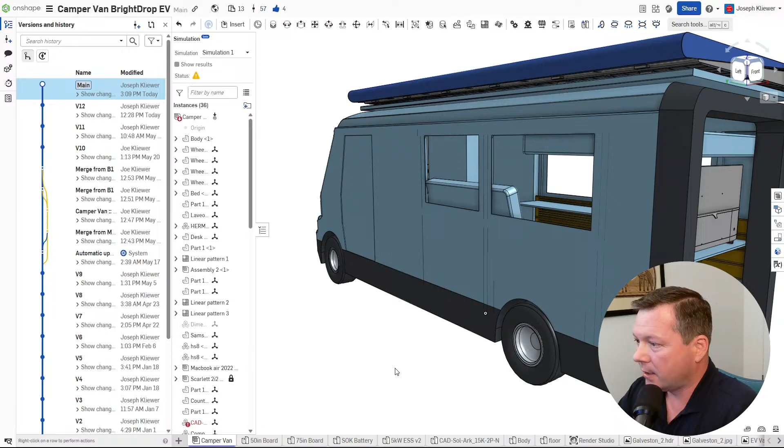So with that in place, if you get one of those, then all you would need potentially is a smaller battery and a DC-DC charge controller. And you could charge the van on solar and then use the van's exportable power to power everything else. That would be a simpler, maybe the most ideal scenario. The only downside is you'd then be limited to the 7 kilowatt. So if you wanted to really power something big, you would still need something like this 15K Sol-Ark or similar. So that's kind of the update there.

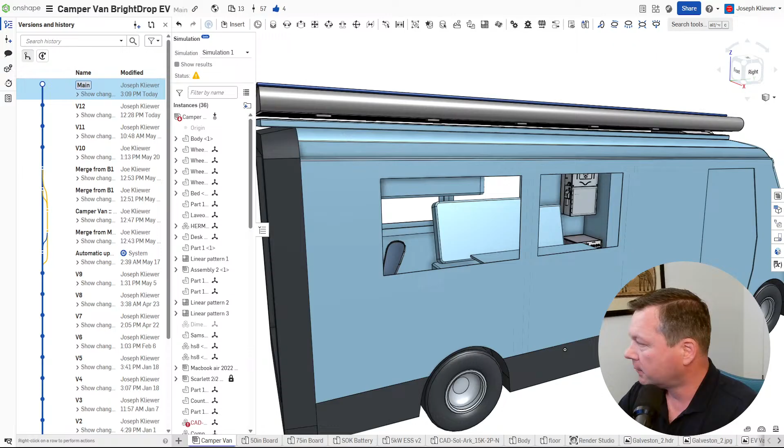Oh, that's the other thing. So I'm working on the next video, and I was thinking of going over the powertrain.

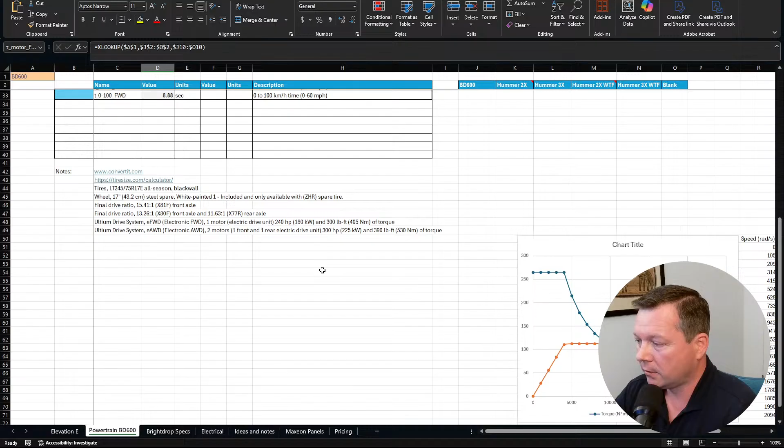So torque. The single motor, it's 405 newton meters of torque, almost 300 foot-pounds. And that's before the final drive ratio. And these motors typically have 2 ratings. They have a torque rating and a power rating. So we look down a motor curve here. This would be the torque. So it starts off at a torque until it reaches a power, and then the torque starts dropping off exponentially as power stays constant.

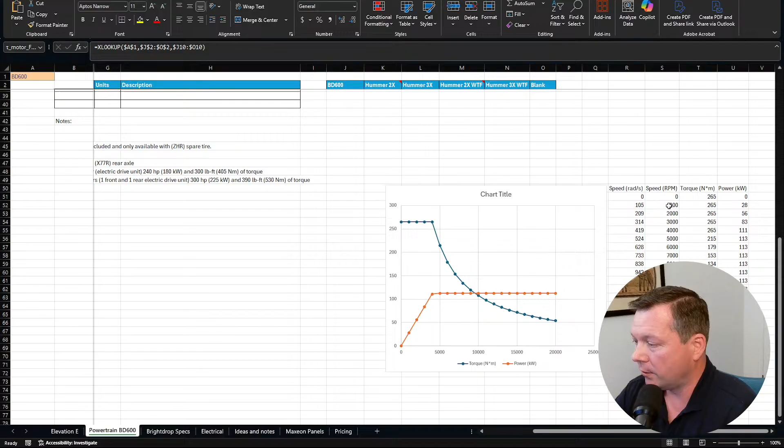And I can probably go over this in another video, but the idea here is to see how much torque we're actually putting to the ground and how capable the BrightDrop van is going to be going off-road and handling a lot of weight, because it's got some pretty powerful motors in it. They are derated, but it's got really powerful motors. So I've heard it does better than the 4-wheel drive Sprinter vans when they're trying to go up a grade or something. It just has a lot more oomph to it. So that's another thing I'm working on.

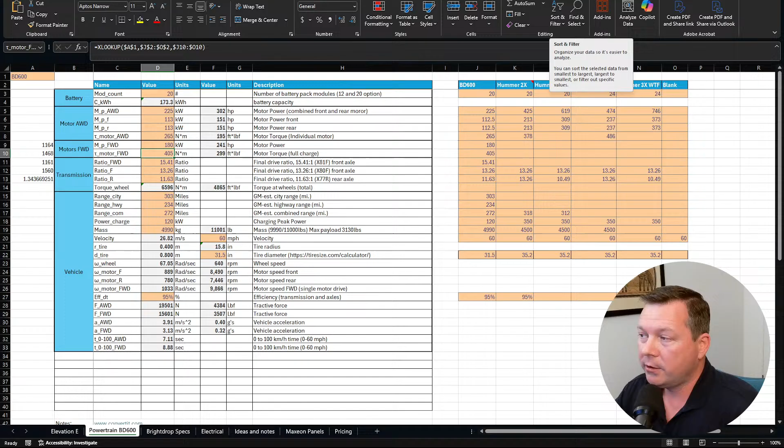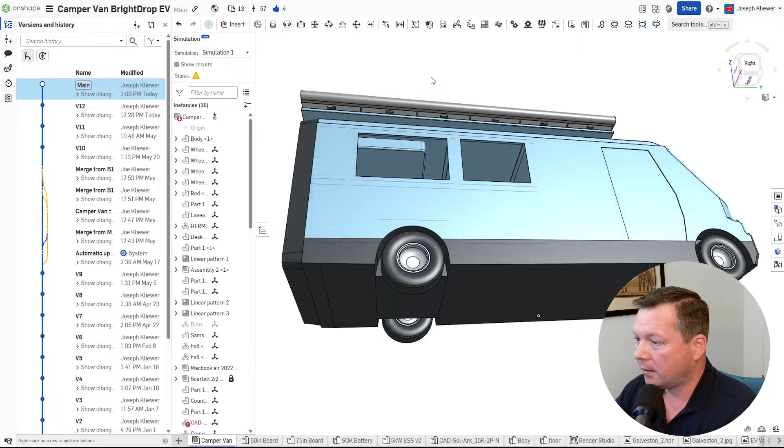But you do have extra trackers on, I think the Sol-Ark has 4 MPPT controllers, so you could put one on all 3 arrays and still have a 4th one for an external array if you wanted to set up another external array. Or let's say you have a remote property somewhere and you put up a solar awning or a carport that you could then just plug into as an auxiliary. So you could have a solar input somewhere where you could plug in a second array to supplement your charging.

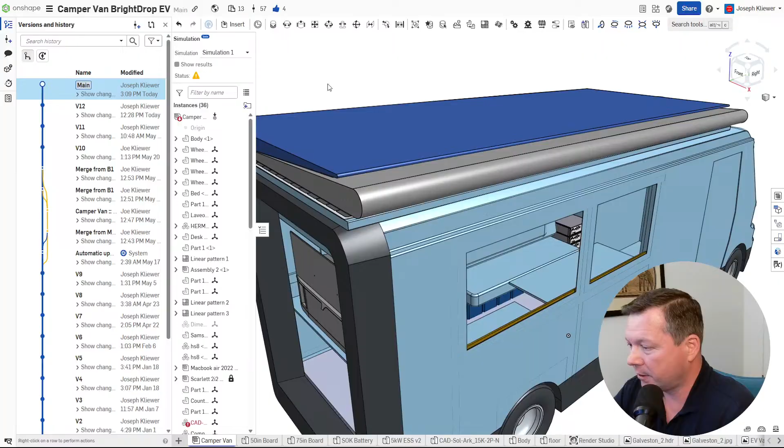But I'll say from my experience setting up solar arrays, I'd rather not. I'd rather just get there, push a button, the whole thing opens up, whether it's a slide out, a pivot, some kind of cool 4-bar link. If it's a slide out array, you could do electric, hydraulic, or maybe pneumatic. Air compressors are noisy and annoying, but they make quiet ones that are used for air suspension systems in vehicles. And it would be really cool to have onboard compressed air.

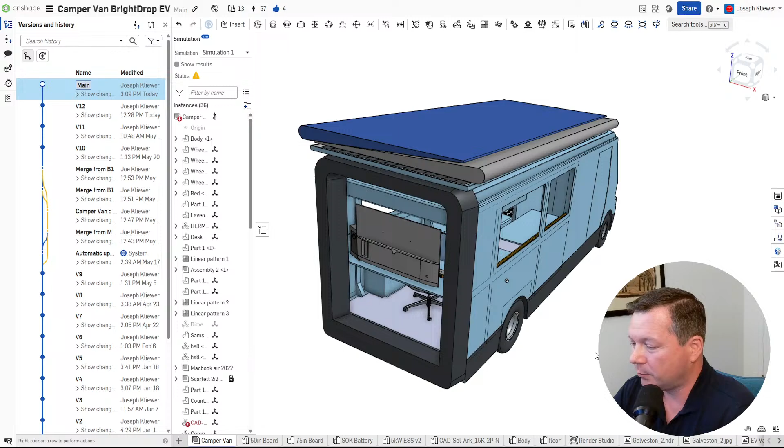So let's say you're mountain biking or something, and you just have compressed air for your stand-up paddleboard, your tires, whatever. Maybe you even want to deflate the tires. You're getting in some sandy conditions on the BrightDrop van, and this thing does weigh a ton. You might want to deflate your tires a little bit to get some more traction, and then have a quick compressor where you can come out and just reflate them real quick. So that could be cool.